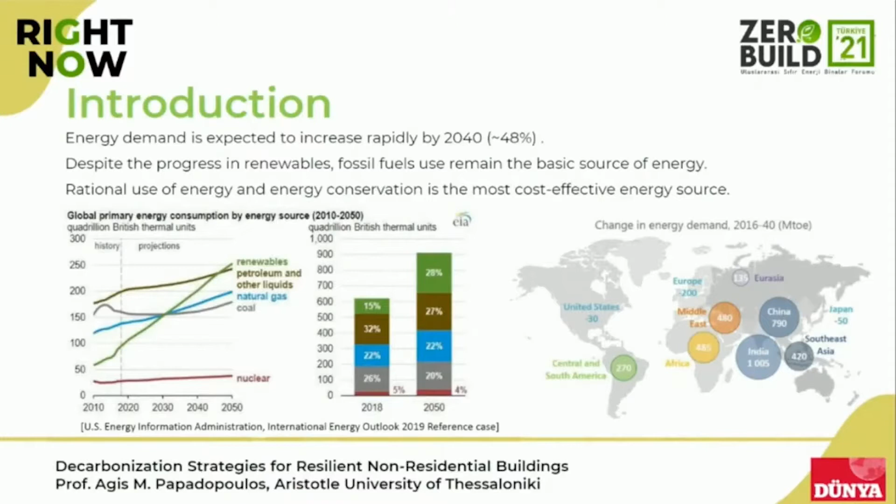So if we could have the next slide please, then we could see that commercial buildings are some of the most important energy eaters. In the United States, they account for roughly 20% of electricity demand and energy demand. In Europe, Australia, and the tigers of Asia, Singapore and Hong Kong, up to 10 to 12%. And even in other countries, they are no less than 5 or 6%.

Expressed in terms of specific energy consumption, a typical mall in Europe consumes about 500 kilowatt hours per square meter, which is a lot of energy. In the States it's more than 600. In Hong Kong it's close to 800. So it's huge amounts of energy used to provide thermal comfort, indoor air quality, and lighting in those temples of consumerism that malls are.

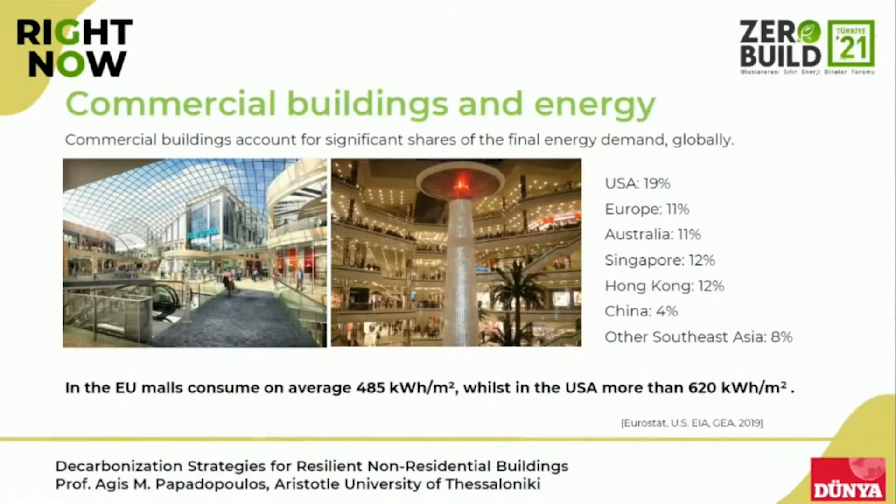If we can see the next slide, then we could also see that hospitals, which have been proven to be one of the most crucial links in the health system in the last 1.5 years, are also extremely important energy consumers. An interesting study carried out by some Spanish colleagues a couple of years ago indicated that hospitals in Europe consume on average anything between 400 and 1,000 kilowatt hours per square meter annually, with a very broad deviation that depends on the hospital type, the services it provides, and obviously the age and systems of the building, but these are huge amounts of energy.

As you can see on the right picture of the slide, even if you compare a same size hospital in Norway and in Greece with extremely different climate conditions, the causes of consumption do not differ that drastically. You need heating, you need cooling, you need lighting, and you need provision of electricity to the vital systems that provide healthcare. So before we spend too much time thinking of how we can improve the energy efficiency of residential buildings, which I do not want to downplay by any means, since they are 80% of our building stock, if we want to achieve our energy goals for 2030 and 2050, we have to move fast.

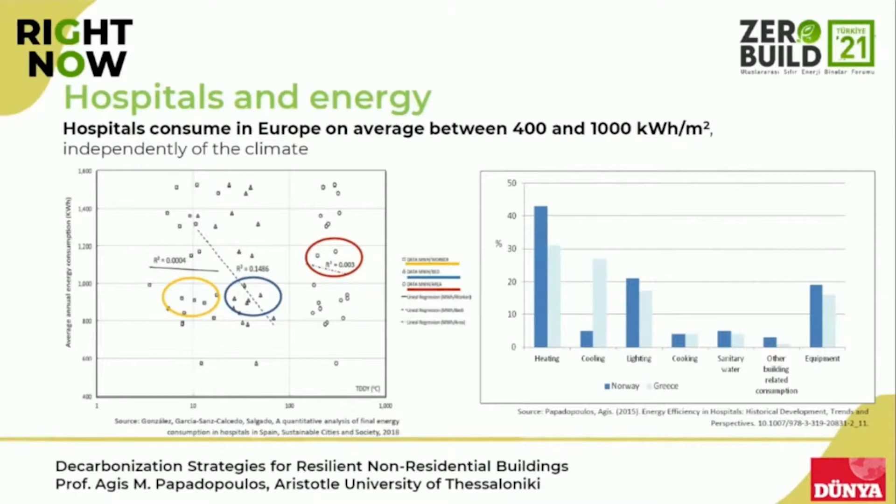Experience has shown that it makes much more sense to focus initially on the big energy consumers, where you can achieve economies of scale and scope, and move then towards the smaller buildings, which as a rule are the residential ones. If we could have the next slide, please, I think this should be fairly known to all of us working in the field.

If we want to decarbonize a building, an industrial process, whatever, there is a very straightforward strategy. We have to understand the problem. We have to reduce the requirements in the case of buildings, heating and cooling, i.e. we have to make a better building envelope. I've seen in the program some very interesting presentations on that over the last few days. Then we should proceed with having an efficient heating, ventilation, air conditioning system, whatever this may mean.

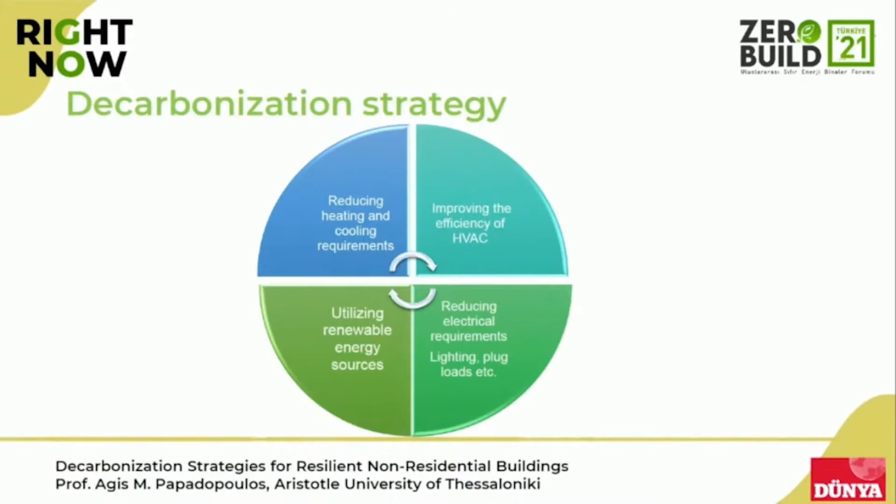Then we should try to reduce the electrical requirements linked to lighting, plug loads, and all those small causes of consumption, which at first glance appear not that significant, but in reality are very important players. Only then does it make sense to utilize renewable energy sources, because it doesn't really make sense to start with renewables in a building that is uninsulated, has an inefficient chiller, and where lighting is still dated back to the 1980s.

How can we proceed to implement the strategy? There are many tools, and thanks to technological developments, I'm sure also in this session there will be some very interesting points of reference on these. We have many tools in our basket.

If we want to improve the energy efficiency of the building envelope, we have excellent thermal insulation materials. We even have super insulating materials. We have cool materials that help reduce cooling loads. We have smart glazings, which especially in office buildings play an important role. So there are many things that we can utilize.

Considering heating, ventilation, air conditioning, if I remember the efficiency values from when I was a young student 30, 35 years ago, we have trebled the efficiency of heat pumps. We have increased the efficiency of boilers by 20 percentual units. We have high efficiency combined heat and power. And of course, we have all the peripheral systems needed to make HVAC run feasibly.

Probably the single most important advance in the tools we have, which will be discussed by the following speakers, has to do with building automation controls. The advance in IT, artificial intelligence, and sensoring has given us unique opportunities for very flexible and very reliable operation of HVAC systems running in an energy efficient building.

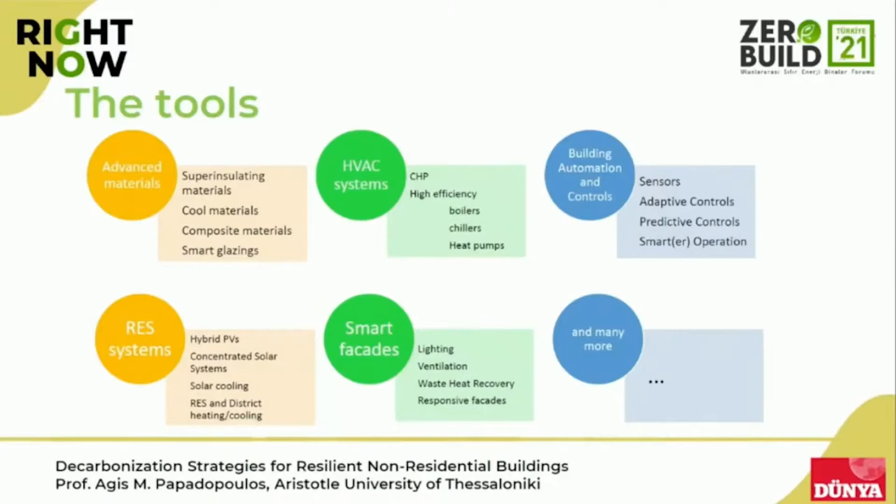We don't, so we proceed with a couple of examples. We have excellent thermal insulation materials that can be retrofitted in buildings and that can achieve U values below 0.03 watts per meter-Kelvin. At the same time, a factor often overlooked, these materials are today much more environmentally friendly because we no longer use chlorofluorocarbons for their production.

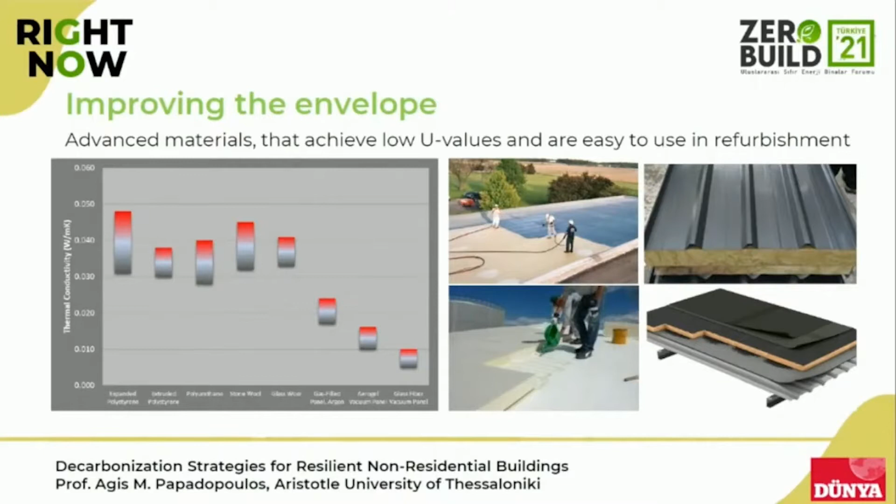They are much safer because they are resistant to fire, and they are also cheaper per unit of energy that they can help reduce in transmission. So there is a plethora of materials which can be used for the various building elements in the envelope, and we can insulate and reduce transmissivity losses, which still account for more than 30 or 40% of a building's losses.

If we see the next slide, we can see that perhaps the most important progress over the last 15 years has been in the use of cool materials.

In materials which can be paints, foams, tiles, that have a very high solar reflectance in the thermal spectrum of the radiation, and which can reduce surface temperatures by anything between 20 or 40 degrees, and hence reduce the temperatures in the floor beneath the roof by, let's say, 3, 4, 5 degrees Celsius, which makes a lot on the cooling load.

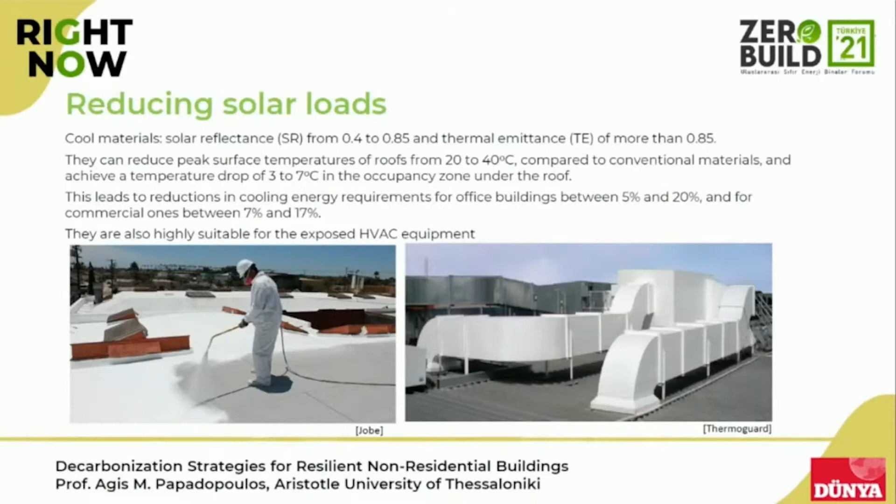What is more interesting is that you can use these materials, which, as you can see in the picture, can be sprayed fairly easily, to cover, for example, the air ducts of the HVAC equipment on the roof, where you have the very first, very expensive part of losses, since you have nicely conditioned air being exposed to the warm Turkish or Greek sun.

And this is not necessarily a recipe for high energy efficiency. On the next slide, we can see that glazings, which are still the Achilles heel in terms of solar loads, have some also very remarkable steps of progress.

Low emissivity glazings, which reduce thermal transmissivity, are well established, and they have become also quite cheap over the years. 10 years ago, they were 50% more expensive than conventional glazings. Now they are perhaps 10 or 15%, and they reduce, depending on how you place them, cooling loads in the south of the world or heating loads in the north of the world considerably.

But what is more fascinating in reality are the new generations of intelligent glazings. You have thermochromic glazings, which are already also in the market and quite successful, and photochromic glazings, which reduce, depending on the intensity of solar radiation, the translucency, and hence you have smaller cooling loads when the sun is shining bright, and they get again more transparent when the sun goes towards the sunset.

And you have, of course, also the active glazings, electrochromic glazings, where you can control yourself how much light you would like to have come through your glass, and in that way also how much cooling you can have, or how many solar loads you can have in the building, and respectively adapt the function of your cooling system.

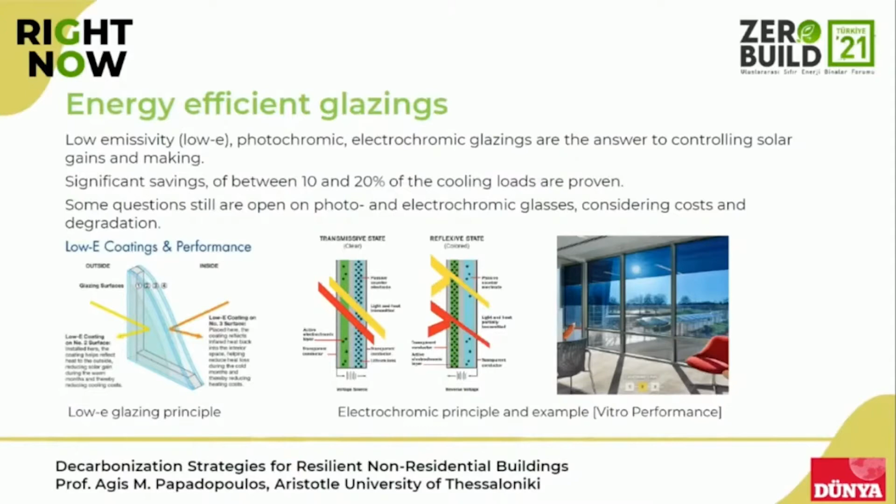It has been based on retrofitting an existing building envelope. It was not yet equipped with HVAC and other mechanical systems. And it's an office building that is packed full with renewable systems, flat plate solar collectors, Fresnel concentrating collectors. It has a geothermal heat exchanger below the building, and those systems together feed an absorption chiller that provides 65 kilowatts of cooling. You have also some photovoltaics.

It can have an autonomy, which is a true essence of resilience, of, let's say, 5 to 7 days. And it was a building that was finished using market available materials, hence for its day, it was state of the art, but it was not out of this world. Now, what's more important, perhaps, it's been operating now for the last 14 years, and it has proven to be also reliable and without major problems in this otherwise fairly complex set of energy systems.

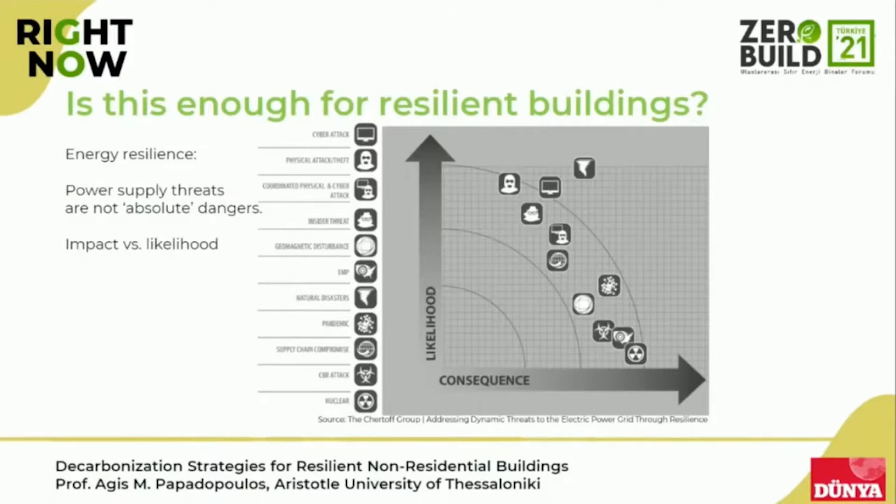If we define resilience as the system's ability to anticipate, absorb, adapt, and recover rapidly from a disruptive event, then it becomes clear that the building has to be able to survive a cut in power supply because wildfires have interrupted power transmission, or because snowfalls have led to the same event.

It has to be able to withstand 5 days of extreme heat when its HVAC system is working overtime. And this has to be done differently than in the past. In the past we used to say, let's double the capacity of the system - 2 chillers instead of 1, 2 boilers instead of 1, and so we shall be happy to survive. This may be resilient, but of course it's not sustainable.

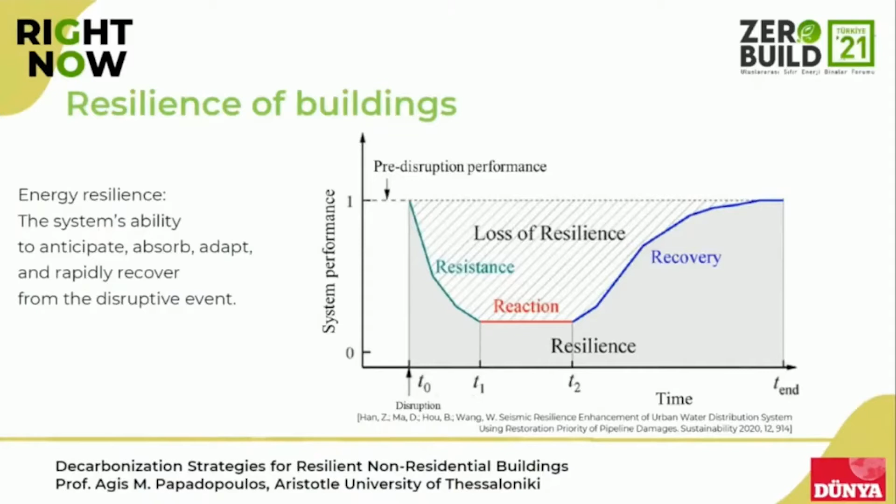Combined heat and power and renewables, if smartly used with microgrids and storage, can cover the base loads even of hospitals - let's say 40, 50, 60% of a hospital's loads - so that they can run the building even in cases of crisis. Of course, to make this work we need a highly advanced automation and control system.

And this has a lot to do not only with the hardware, let's say the building automation and control system according to EN 15232, but also with the software, which allows a very smooth integration of all those aspects.

This is obviously linked with the controls, which are becoming smarter and smarter. And eventually this is linked to how we integrate the building with the grid, and possibly or probably in the near future with microgrids with other buildings.

In the next slide, we can see that for this to be successful, we have to keep in mind the technical dimension. We cannot simply add renewable CHP or even a microgrid to a building if the heating, cooling, and hot water provision systems are not thought to operate as one.

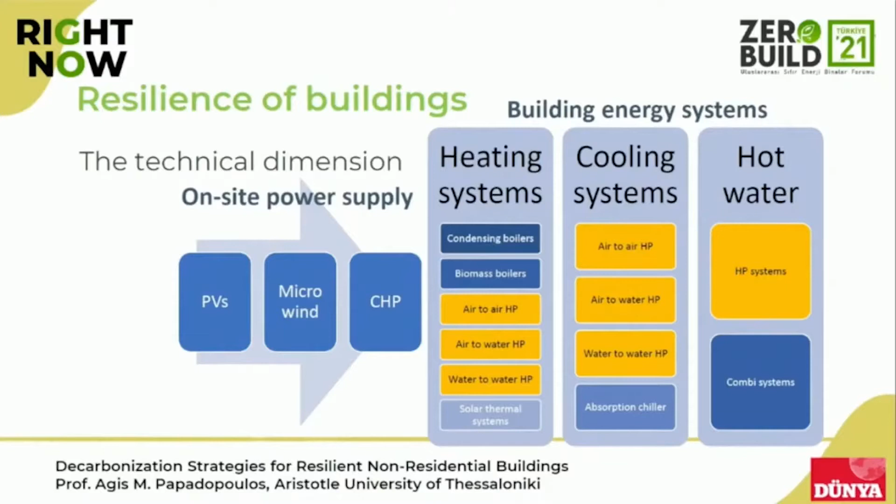On the next slide, we can see that this has a lot to do with how we manage the demand. Traditionally, you can do 3 things: shift the load, for example by using ice storage so that you can capitalize on the availability of electricity overnight, so that you can store cold and use it for your air conditioning system over day.

Shave the load by reducing solar loads and hence air conditioning, by having a nice sun protection system or some advanced glazings, or fill the valleys so that you have a more uniform demand profile, where the utilization of a CHP - a combined heat and power system - makes much more sense.

But this is not a trilemma. In reality, we have to do a bit of everything, because you can't simply solve all your problems by shaving the loads - then you will have a building that is not functional and safe.

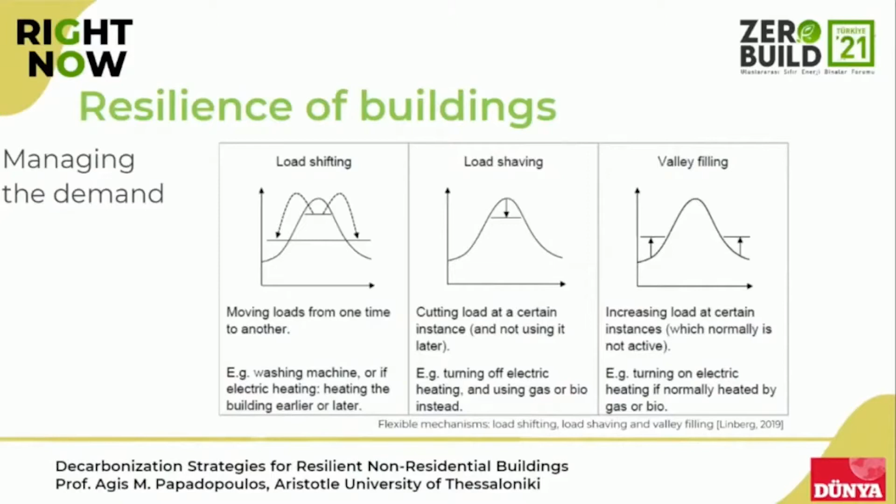So if we see the next slide, please, then we can see that the main step ahead, after having done a building that is sound, well, effective and resilient, is integrating it with other buildings, integrating a local microgrid, integrating it with the electricity and gas infrastructure.

And especially as we are moving towards also a horizontal integration of systems, this becomes more and more important. One has only to think of reducing the impact of transport, which leads to electrical mobility, to e-vehicles.

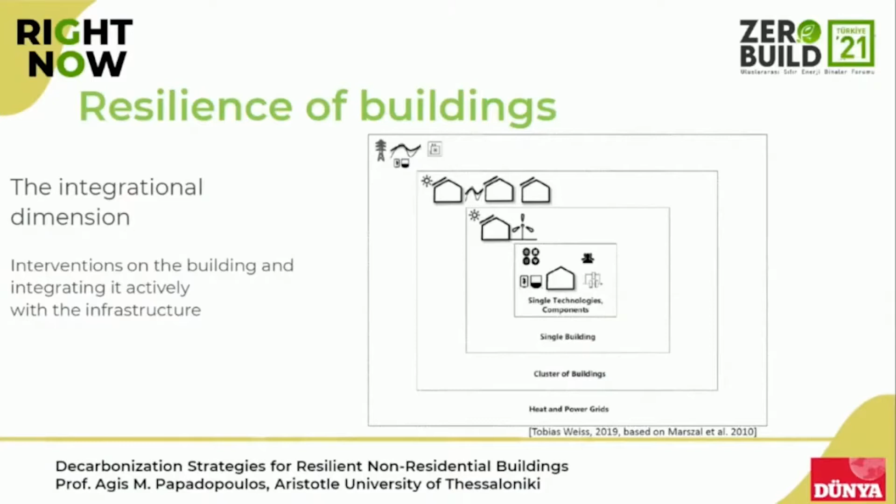If you have 20 or 30% of your vehicle fleet being electric, and you haven't planned your built environment so as to support them in an efficient and effective way, then you will end up probably in a mess. So we don't simply have to dimension renewable systems on the buildings with respect to the peak demand of the building itself, but we have also to keep in mind that buildings will be able to support the vehicular fleet of the hospital or the school or the university in order to reach an overall optimum result.

One example: this is a big hospital in Alexandroupolis, very close to the Turkish border, constructed back in 1996 if I remember correctly. It's a quite big hospital, 88,000 square meters of air-conditioned area, 670 beds, with an average consumption of about 420 kilowatt hours per square meter.

For a hospital, it's a decent consumption. Still, a couple of years ago we did a study, hopefully being implemented in 2022, that if we utilize a very straightforward CHP plant with two units of 1,750 kilowatts each, they can run at a base load of 4,500 hours annually, which is fairly reasonable. They will be able to cope with 70% of the requirements. It doesn't make sense to go for 100%, feasibly it's a disaster.

And we can achieve primary energy savings due to the much better efficiency of combined heat and power of something like 16%. It may not sound like a lot, but if you think what 16% in the hospital sector would mean, which is a big energy consumer, then it's a very important step towards reducing carbon emissions from buildings.

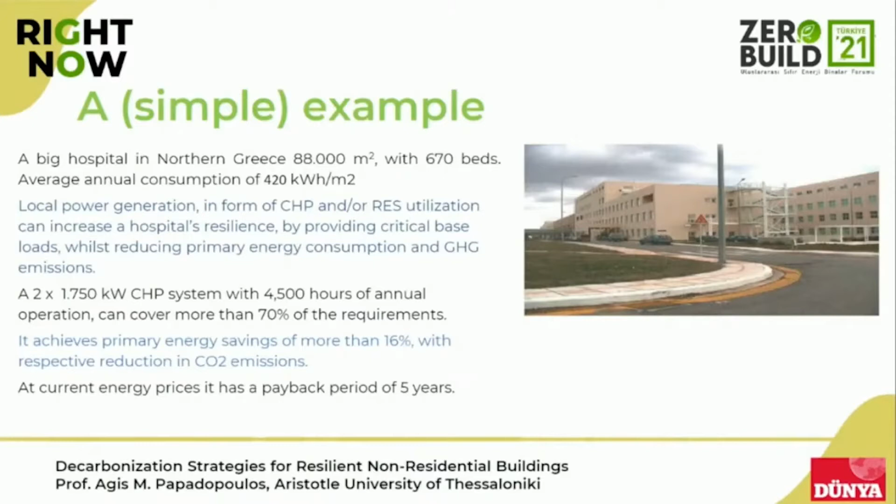If we see the next slide please, this is only a reminder that whatever we do, high-end ambitious strategies, IT, CHP, PVs, whatever, it's important that this happens on the base of an integrated assessment of the energy renovation measures, from the plain simple facts like insulation, to high-end IT.

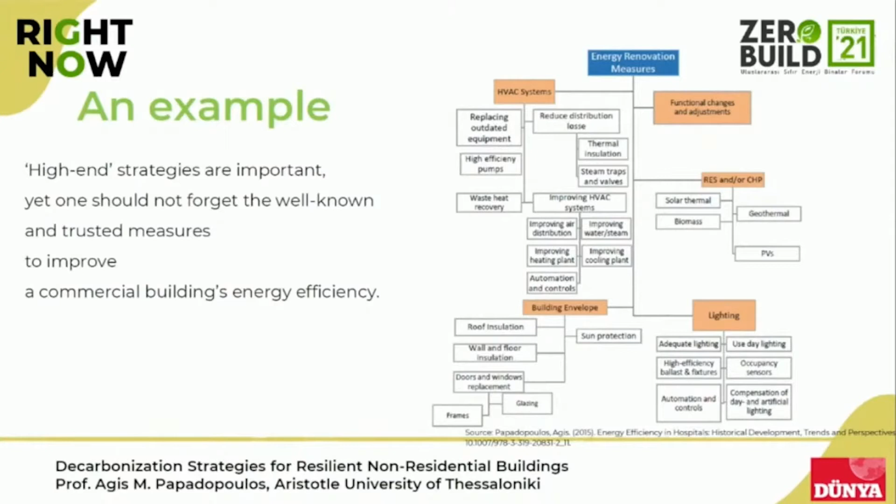So if we come to the next slide, which is probably the one before, I hope I have convinced you that resilience and sustainability are in reality not contradictory terms or goals. If we make our buildings more sustainable in this advanced way, then they become automatically more resilient to extreme problems and phenomena. Hence, and I come to my last slide, the goal should be to promote resilience, to promote decarbonization, and not to forget to promote also the social integration factor, since buildings have to be affordable by those who construct them, those who run them, and those who use them.

Thank you very much. I hope I didn't take too much of the extra time you were kind enough to give me.

Thank you, Professor, for the very well organized presentation. And I see that the tools listed for effective decarbonization strategy is the key to start. But I think, of course, especially these new innovative digital tools play a key role as well. But towards resilience and decarbonization, more actions on sustainability should be taken, as you have also suggested, so-called electrification of systems as well. So thank you very much for your presentation.

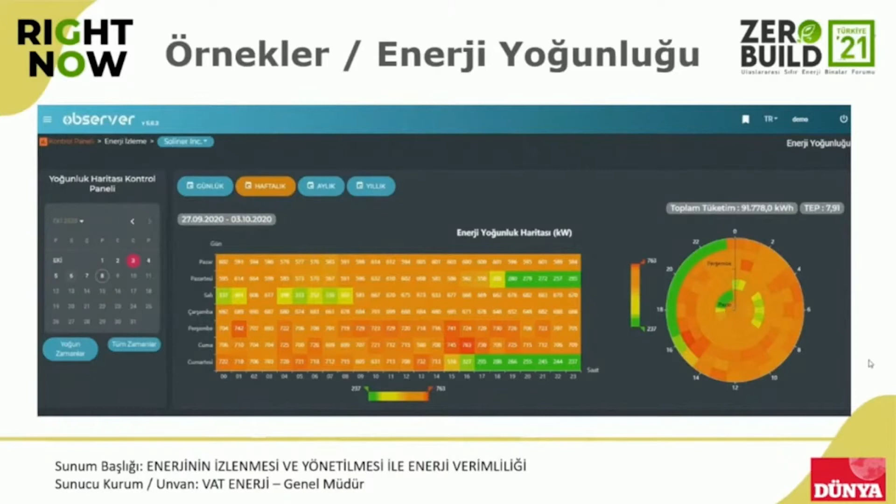There are different examples - I'm just trying to show you some more recent examples. The energy density is very important for us. We should not compare on the basis of the bills, but on the basis of the energy density. The energy density maps need to be created, and we need to focus on these concentrations so that we can achieve energy savings.

Let's continue. We need to have some alarms or notifications, as I said. For example, if there is a 7 degree Celsius difference between the outside and inside temperature, we can get a notification. For example, if it is 27-28 Celsius outside, and we make it 16 inside as a result of the air conditioning, it may not be so efficient. So if we put criteria, and if it is above or below this value...

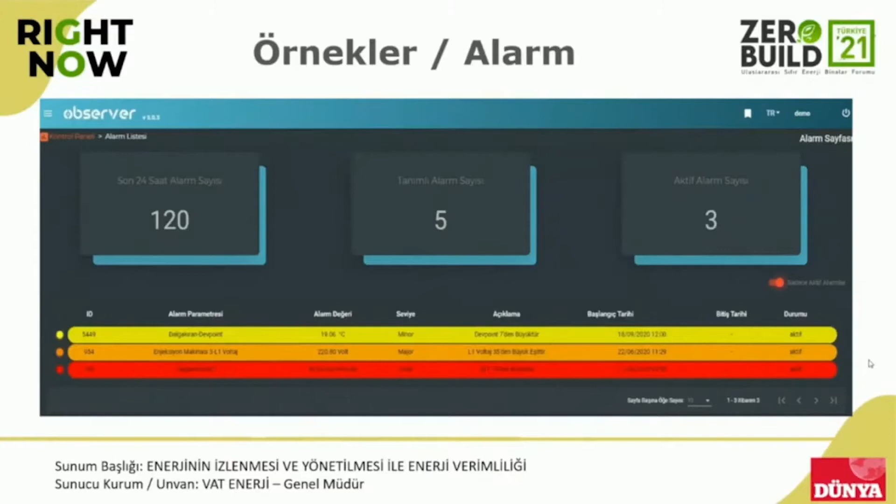...then we need an alarming system, because we need to set the limits. There must be certain alarms when it reaches below or above, and when there is this notification, it must act. Therefore, this digital energy monitoring and management system, putting certain limits and alarms, are important features. Next slide, please - another important point, the most important point, is the energy management system.

For energy monitoring and management systems, we have this module. In Turkey, it has become to some extent an obligation. In buildings and in the private sector for industrial facilities, an energy management officer must be recruited; it is compulsory and needs to be completed by 2023. You need to manage your energy in a sustainable way, control it, and get results. We add this issue to our module and have all the systems. Of course, if you control all the energy values from the system, then ISO 50001 becomes important.

It also makes certain recommendations. For example, in a municipality building we worked on, as a result of our monitoring system, which we call the Observer Energy Management System, we found energy potentials in areas like theater halls, where we created certain maps of energy density. When we monitored that area at nighttime, we observed huge energy entry and output of dense energy, and during the nighttime some departments had high consumption levels. We always say that even in standby mode, equipment consumes energy, and we can solve this issue with an automation system. That's what we recommended to the municipality.

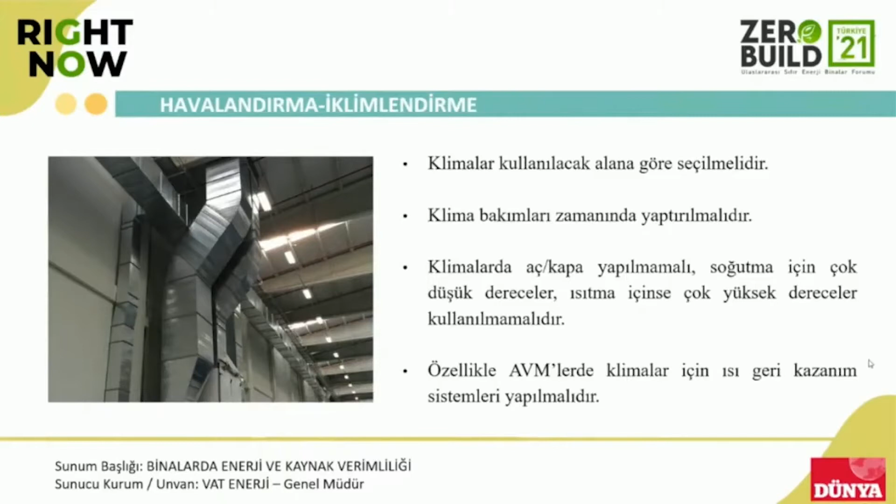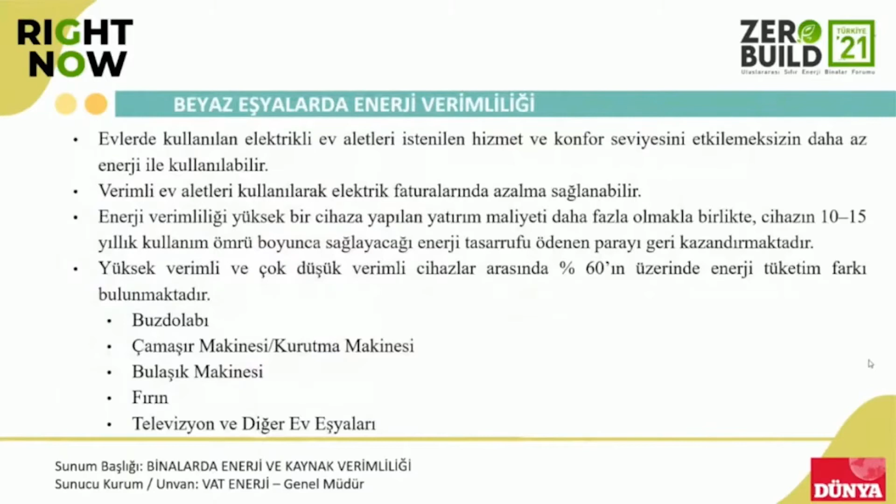Apologies, we are running out of time. Can you wrap it up? It is the same for the equipment. Let's skip this part.

Water: in fact, Turkey suffers from drought, and it is the case in other countries as well, so we need to save water. Renewable energy is an issue we have discussed; there's a law that regulates up to 10 kilowatts.

Automation. Monitoring is not enough. In the past we were saying monitoring was satisfactory and efficient, but monitoring is not enough, we need management. There is a need for central management, and automation systems can save energy and contribute to efficiency.

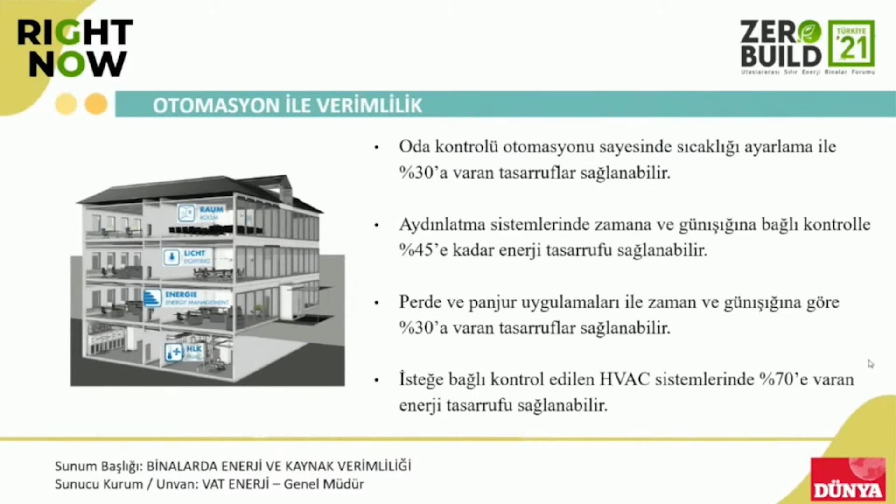Then we can achieve zero build, which is the title of this conference. This is the last slide. Let me share some percentages: it might be up to 30% savings in heating and lighting with appropriate lighting, and with sunlight we can save energy up to 45%. If we pay attention to this issue, we can achieve it.

So these are my contact details. Thanks a lot for your patience. Everyone must take responsibility and fulfill their responsibilities to achieve the reduction of CO2 emissions. To me, there must be a course in our national curriculum at all levels, primary schools, secondary schools, etc.

Thanks a lot for your presentation. I fully agree with you, because these systems need to be integrated into automation so we can achieve it. You showed so many cases and shared some figures with us, and also talked about how we can achieve efficiency. It is very important for us and quite informative.

As a technology enabler for bringing about building energy efficiency in buildings, let's listen to her presentation on data intelligence for smart buildings. Ms. Sandeep, the floor is yours. Thank you.

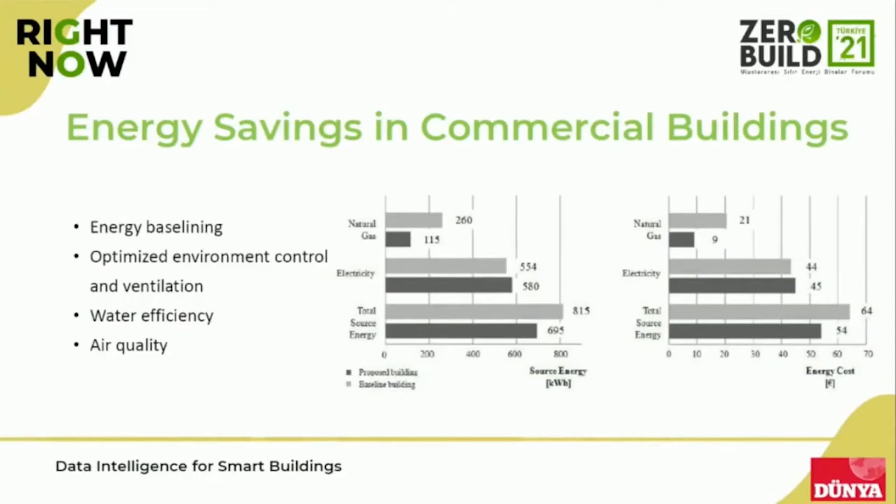But in reality that is never the case, because we also have cooling loads, HVAC equipment, CRAC units, and chillers in data centers in addition to the IT equipment. But it is good to always minimize the amount of energy consumed by equipment other than the IT equipment.

One major way to do this in a data center is through prediction of hotspots. There is a high correlation between power consumption and temperature. If we monitor temperature effectively in real time, we'll know that zones where temperature is going high are hotspots, and power consumption there will go high. So we can take proactive measures to redistribute the load such that energy consumption in those racks and servers comes down.

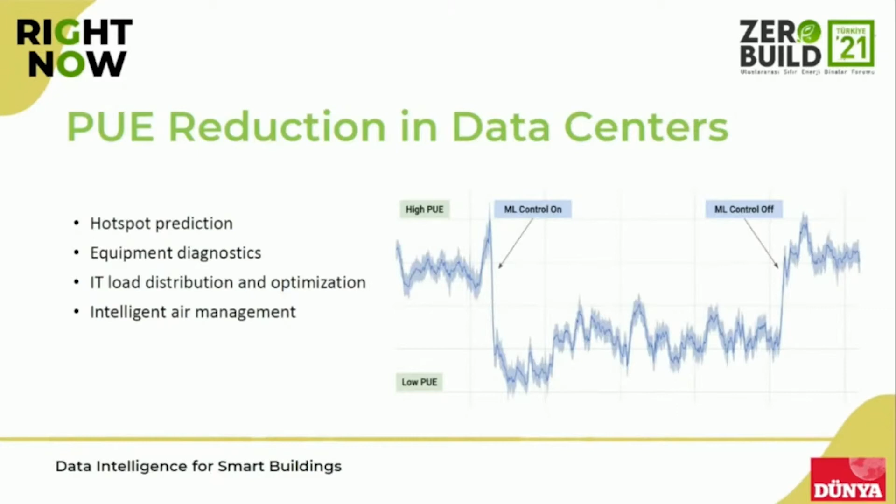Next slide, please. So in the hospitality sector, the most important aspect is occupant comfort. One major consumer of energy in the hospitality sector is the lighting system.

Managing the lighting system dynamically, similar to the ventilation strategy, by looking at ambient conditions based on occupancy density, and by changing the intensity and hue of the lighting dynamically as per the load, the temperature, and the amount of light available at a certain time of day - all these can contribute to energy savings in the hospitality sector.

And energy consumption breakdown - we will need to break down the energy consumption to the most granular levels possible, to the meters and sub-meter level and at the equipment level as well. Because if we don't know from where the energy consumption is going high, we will not be able to control it.

Dynamic environment control, more like temperature control, is another way to achieve energy savings. Consider a resort with multiple rooms in different regions of the building. Some rooms may need a very high set point, while others may need a much lower set point - for instance, rooms facing or very close to vegetation may need a very low set point. If we can do these set point adjustments, we will end up saving energy.

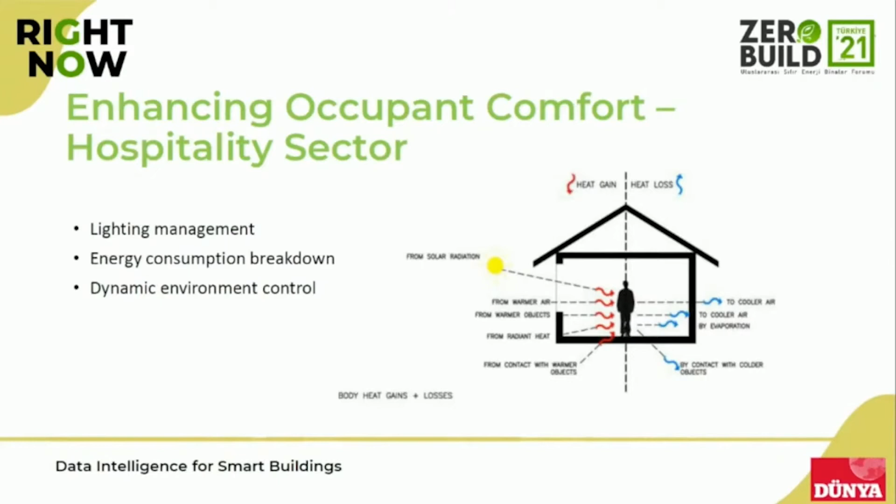Yet another type of commercial building which consumes a lot of energy is hospitals. One major consumer of energy there is escalators and lifts, since most of the patient flow and material movement happens through them. If we can optimize patient flow dynamically and material movement using queuing models, we can end up saving a lot of energy.

Yet another way to do this is environment control, such as temperature control in hospitals. A lot of energy is consumed for sterilization of medical devices, and it's very important to maintain temperature within a specific range. If it goes beyond or below those limits, the process has to begin all over again, causing a lot of energy wastage. Hence it's very important to monitor and control this effectively.

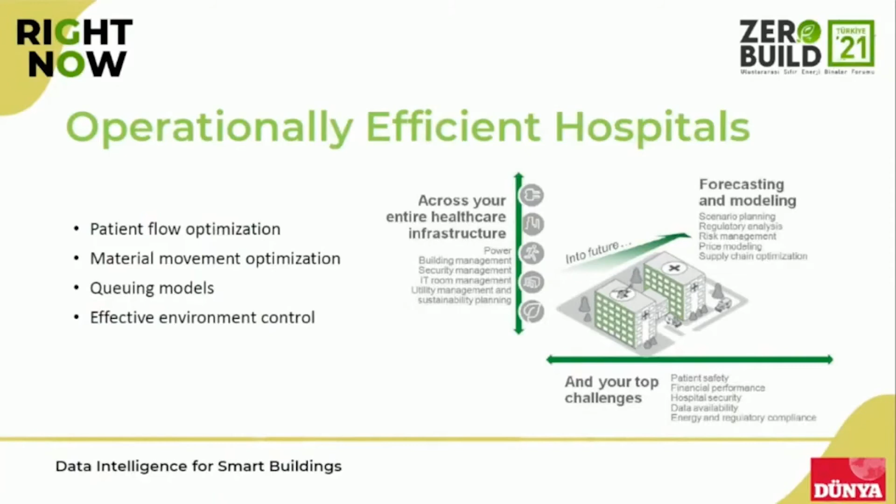In the manufacturing sector, the operational efficiency of the manufacturing process itself can be improved, and hence we can also save energy in turn.

DER scheduling and forecasting is one way. DER is distributed energy resources. If a factory draws power from multiple sources today—the grid, various renewable energy sources, a rooftop solar unit, or battery storage—then deciding when to draw how much power from each source, and optimizing this, can help bring about energy savings.

Optimizing operations like workforce management, utilization of machinery, and utilization of space in the factory can also help in energy savings. Process improvements and cycle time reduction is another important use case for AI in manufacturing. If there are redundancies in the manufacturing or calibration cycle, these can be spotted automatically using data analysis, which can help improve the process and bring about energy conservation.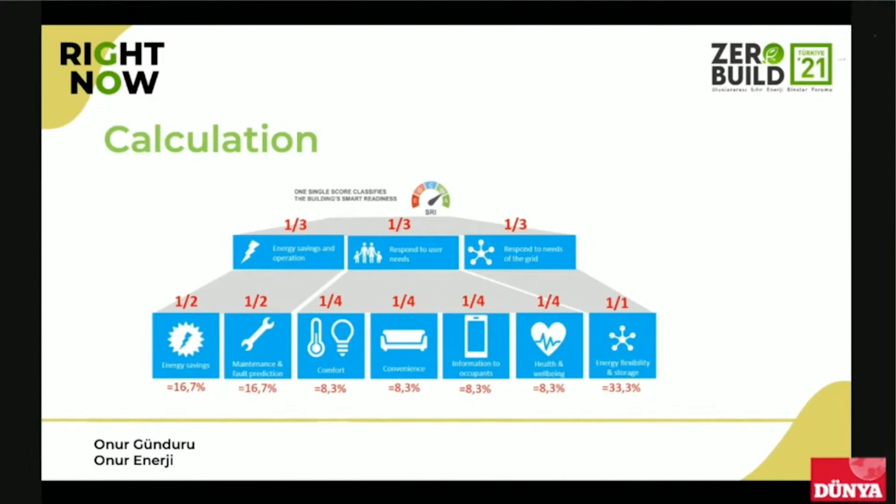Therefore, in the Mediterranean, this has a shorter period. That's why I wanted to highlight this part. As for the other sections, they also matter individually, but there were already presentations on those components. That's why I will focus on the last one.

An example grading shows us that energy demand flexibility has a 33.3% grade, which makes it well ahead in terms of overall evaluation. Is it fair? I think it's fair.

Because when you look at it in terms of carbon emissions, one of the sine qua non is that the building should ensure how it responds to this emission situation in line with the building. Our emissions mostly result from energy consumption. So we should be aware of it as soon as we plug in a device. We don't think about the rest, but there are systems, or we need systems, that will help us think beyond plugging in a device.

So what is energy demand flexibility then? Let's briefly look at this. Shifting electricity consumption to coincide with times when electricity is clean and cheap means energy demand flexibility. In our country and in Europe, although some countries are a little ahead of others, we see baby steps. These systems can be way better.

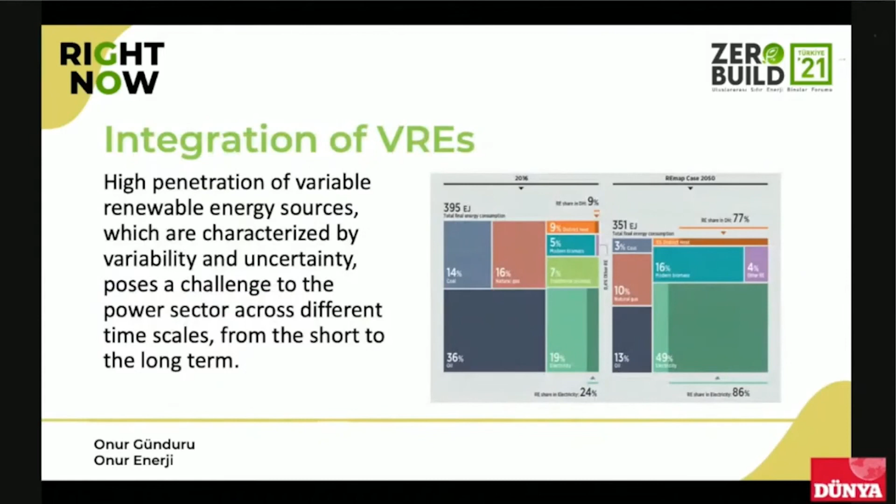I already referred to renewable energy, so I will skip this part. What kind of practices do we see on demand side flexibility mapping? In industrial, commercial, and residential units, we might have practices like power to heat, where you can have thermal storage. You prepare the heat beforehand and use it when needed.

Or you can store hydrogen in commercial buildings and residences. You can have storage for electric vehicles, or consume from them, depending on the need of the grid. You have a storage means, but you need to orchestrate it.

We can talk about smart appliances as well. There are very successful examples. For example, according to carbon emission data, home appliances work accordingly. I tell my washing machine it should operate when carbon emission is low, but make sure my laundry is washed when I come back. So it tries to wash at the lowest emission time of the day. There are very good examples of this.

We can also achieve this in industrial processes, and numerous processes need to be rearranged and made flexible according to these facts.